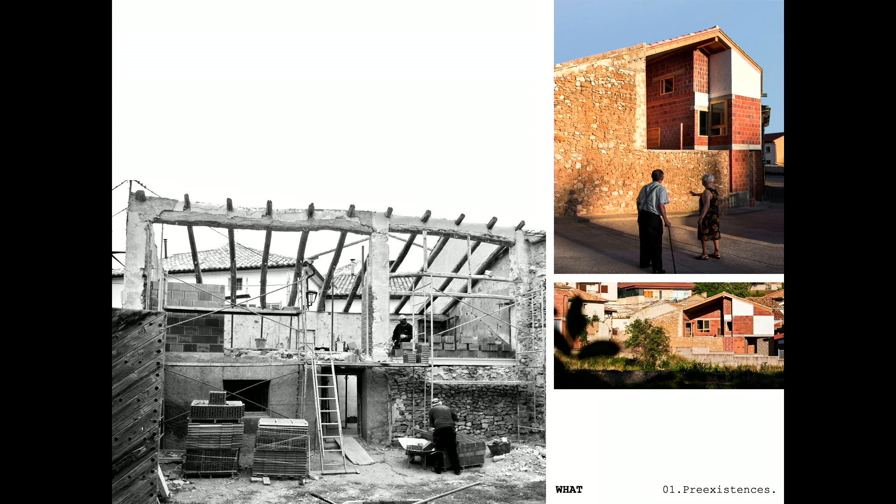The house is built occupying an old corral in which there was a barn, a small construction with 2 levels, one for the animals on the ground floor, another for the storage of grain on the first floor. The stone walls and the roof beams have been kept in their original position.

It is the geometry of these elements that shapes the overall volume of the project. It determines the inclination of the roof and the dimensions of the interior court.

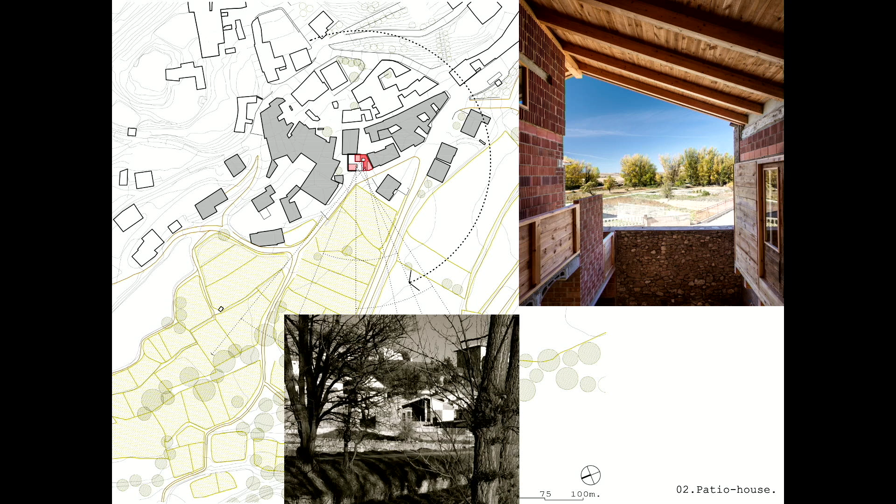The plot is located on the edge of the village, where the houses end and the orchards and fields begin. The house is protected in plan and adopts a U shape. In this way, it avoids visual contact with the neighboring houses and opens toward the landscape, and at the same time generates a patio, a courtyard in the center.

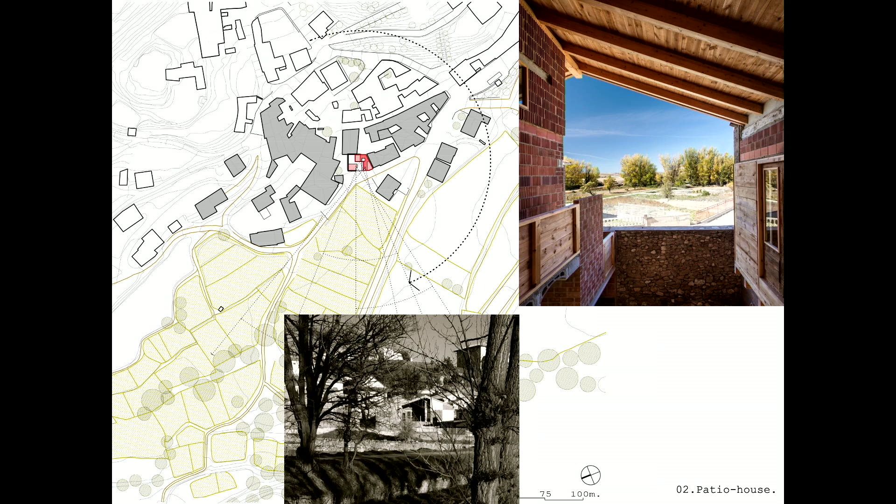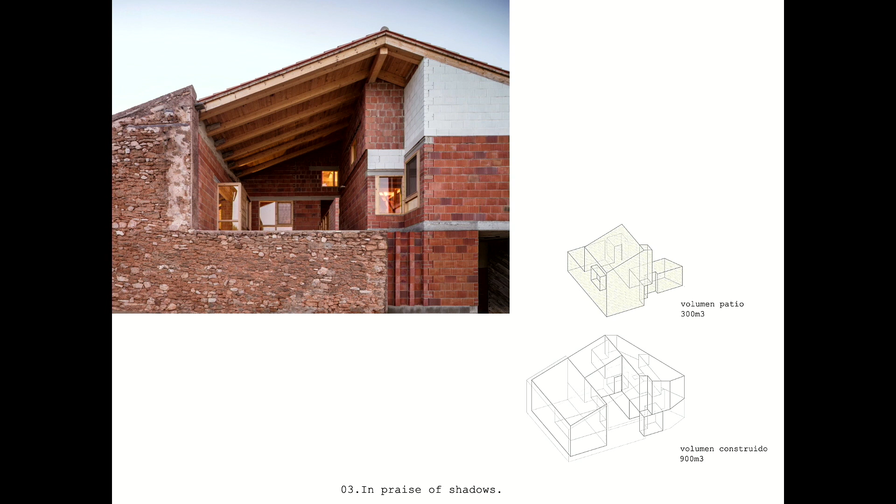The whole house is topped by a very simple sloping roof. The patio is also covered and becomes a kind of indoor volume, which remains always protected and shaded. The volume of the patio equals 1/3 of the total.

All the external woodwork faces the patio, and it's also protected from the water and sun. That's very practical because they can be very simple, and some of them even recycled. In fact, we could consider that all the woodwork is internal woodwork.

The access is through a large, recycled corral door. When it is open, it becomes an area to sit down or stop to talk with the neighbors at the entrance, which is a very common activity in the town.

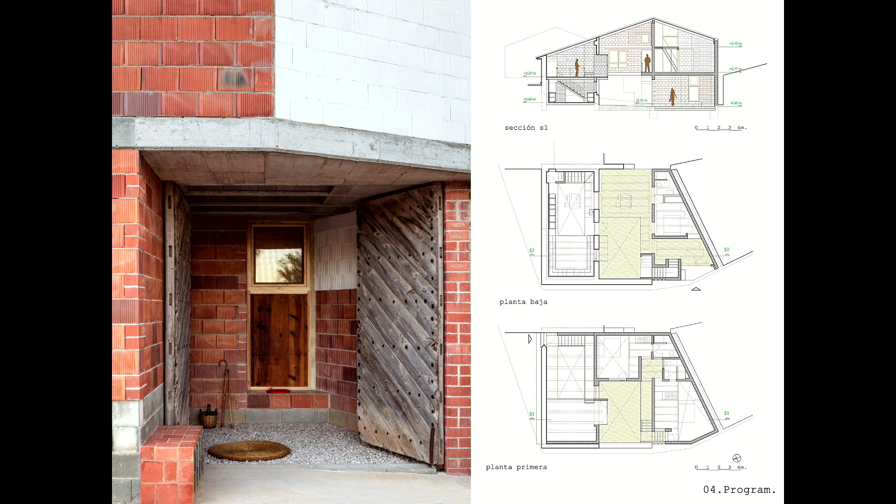This space communicates with the patio, passing under the house. The patio is the heart of the house, the most used and most polyvalent space. Most of the day it is shaded and well ventilated.

This is the access: on the right side to the common areas, on the other side to the 3 rooms separately. The common area is situated inside the thick stone walls of the old construction, which is also semi-buried.

These zones maintain a constant cool temperature, always around 25 degrees in summer. It contains the dining room area, also the patio, which is used most of the time.

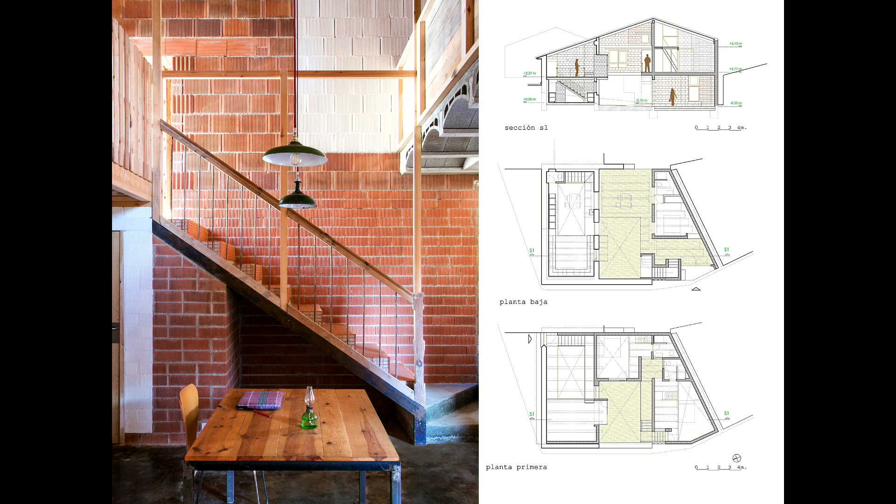The kitchen—well, in fact there are 2 kitchens in one, to allow the use of several people at the same time. And a wooden mezzanine with the living area that is also used as a study and play area for children.

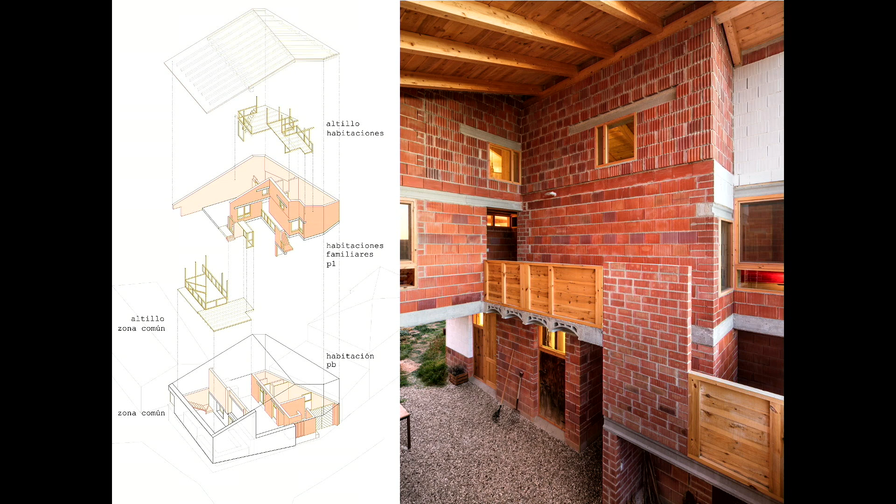The 3 bedrooms are situated on the opposite side of the patio: 1 single room on the ground floor and 2 family rooms on the first floor. They are built with brick, with a single layer of thermoarcilla, thermoclay.

These walls are, of course, less insulating than the stone walls, but enough to insulate from the sun during the day and accumulate some heat that is released at night. This works very well because at night the temperature drops a lot and it's usually quite cold. That's because we have to think that the town is at 1,300 meters altitude.

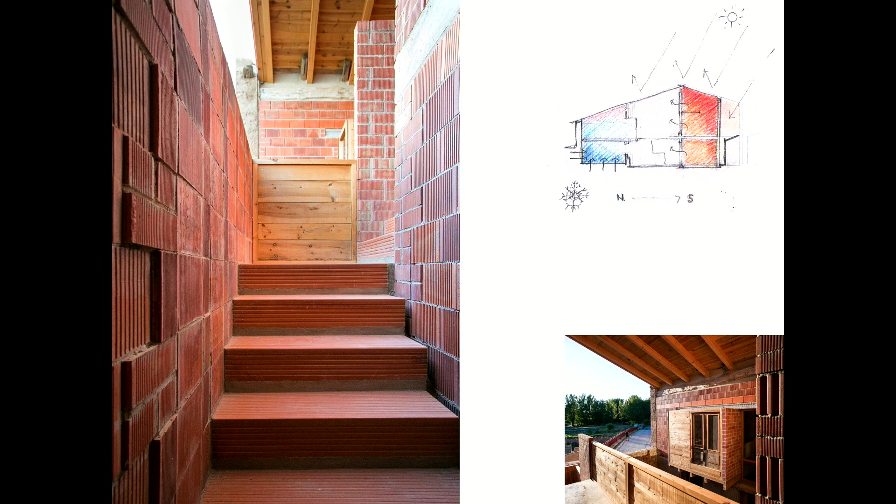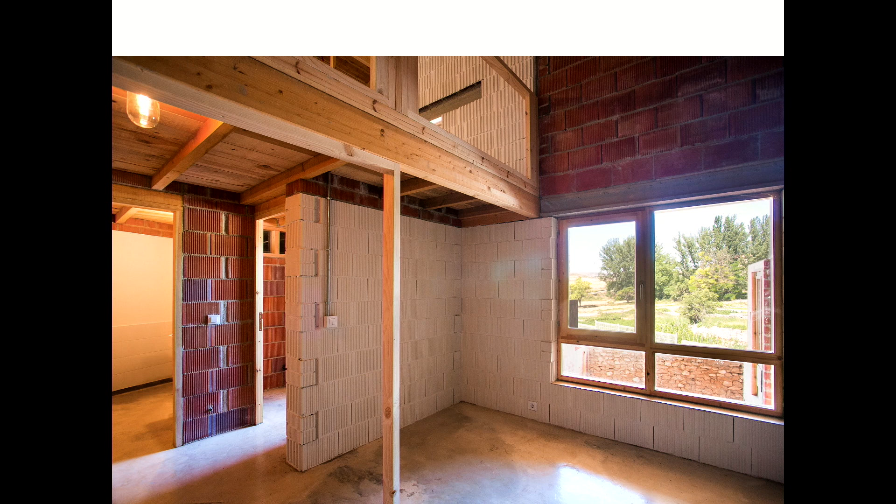The wooden superstructure occupies the highest part of the house, taking advantage of the space that remains under the sloping roof.

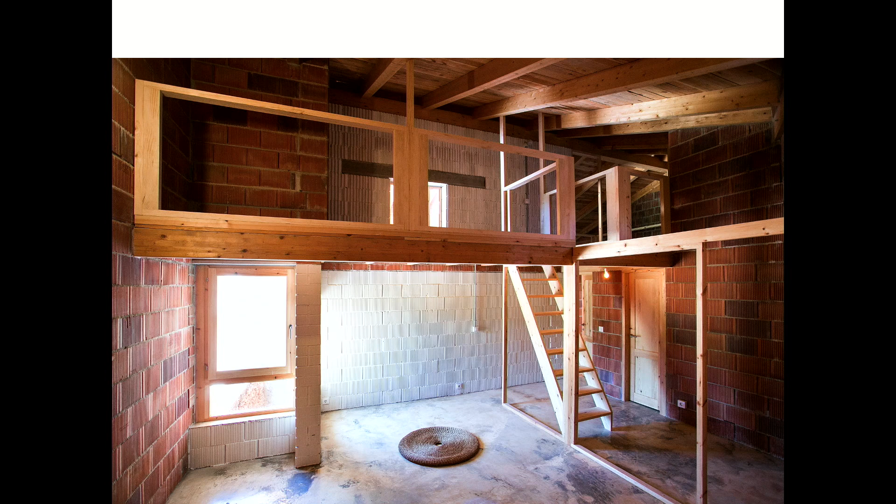The interior divisions were made with wooden frames that were later covered with recycled wood to make the railings. In the future, these divisions will allow us to split each room in 2 if we want.

I have to say that a few months before starting the construction, I didn't have a clear idea of what materials I would use to build the house, nor which would be the constructive system. The answer to these questions arrived in a very simple and natural way during the previous visits to the site.

While traveling through the surrounding villages and visiting the local warehouses and material stores, but especially looking for the builders who could work on the house.

I remember very well this day. I was talking with Puyo, a bricklayer who was doing small things in the area. He explained to me that thermoclay was used a lot, especially because it was a large piece and allowed them to work very fast.

And then, casually, he said: what I do is take the thermoclay 24 centimeters deep, because a brick is 24 centimeters long, so it allows me to combine 2 pieces without having to cut.

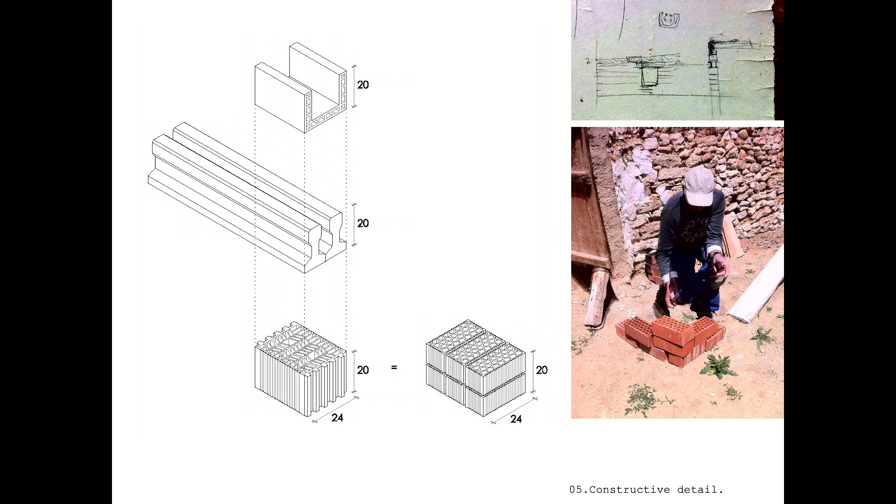The thermoclay piece of 24 centimeters combined long and height perfectly with gero, so one piece of thermoclay equals six pieces of gero. Thermoclay is the big piece, and the smaller brick we call gero. He also explained that the prestressed concrete beams with a height of 20 made 12 in the base, so two beams also made 24 centimeters, the same as the thermoclay and gero. Finally, the U piece also makes 24 bottom by 20 centimeters height.

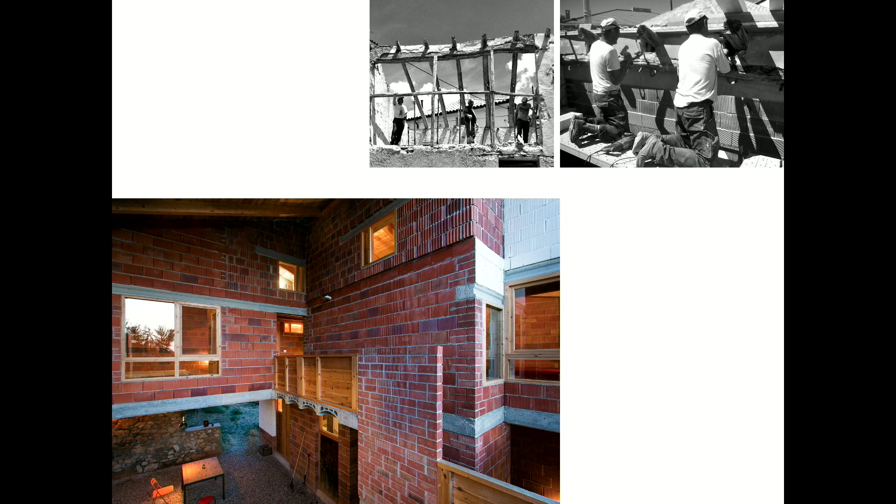It was a conversation of just 30 minutes in which we took bricks and put them on the ground, making one-to-one models of different situations. We also made some drawings on a wooden board that was at the site, and in these drawings, for me, everything was already there. In fact, I saw that with that unique constructive detail, the house could be built.

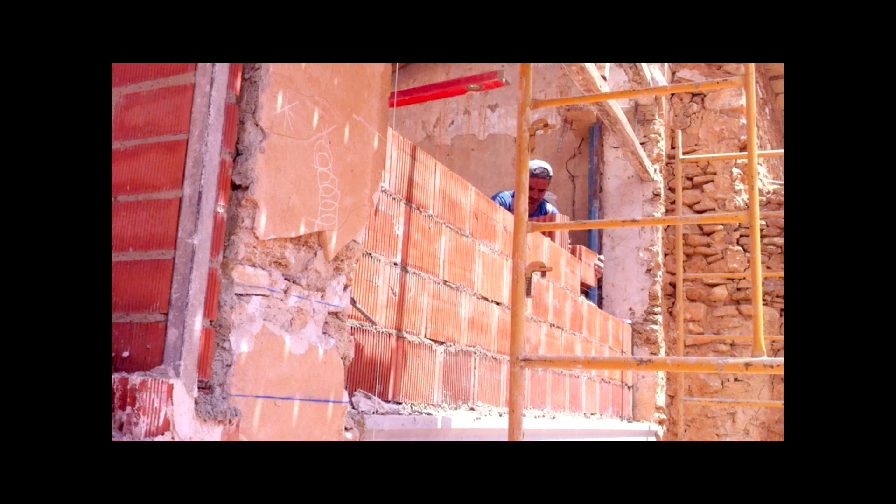Finally, we chose this brick layer and his assistants to do the work. They were a group of 3-4 people from Romania living in Teruel. They work a lot for the people of the area, doing basically reforms and partial repairs of houses. They charge by the hour, 16 euros per hour, 10 hours a day, almost non-stop. In this case, charging by the hour is decisive, because the simpler the construction, the faster they could work.

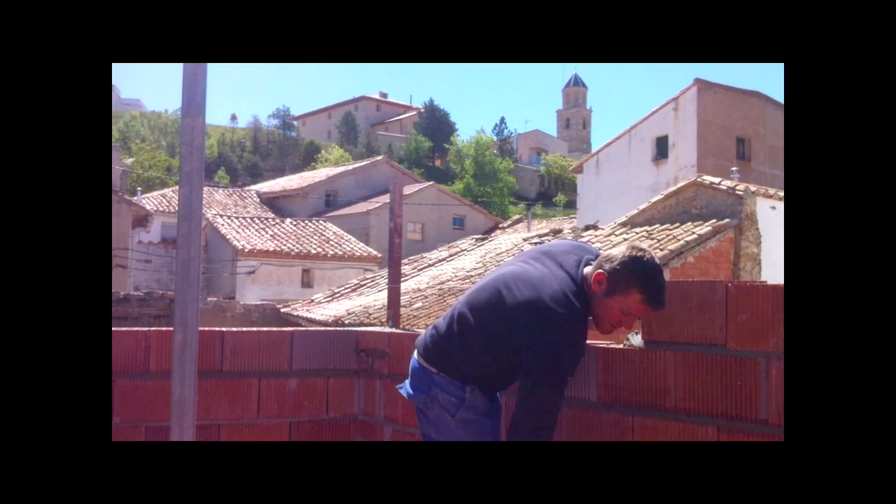And the faster they work, the cheaper the house could be. The fact that the constructive system we chose was very common for them allowed us to advance very fast and therefore economize the construction.

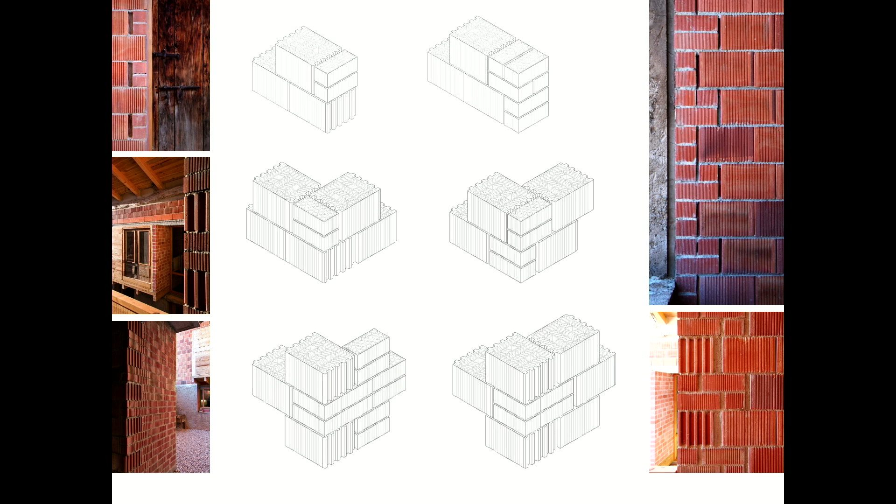The idea was to build like a Lego, fitting pieces without having to cut them, building a system of walls 24 centimeters deep with a horizontal joint rhythm every 20 centimeters. The combination of thermoclay with gero allows solving wall ends and corners in different ways, always without cutting pieces. It was about doing what they always did, but with the difference that it could be seen - the same system, but with good 'lyrics' (aesthetics).

Also, in the same way that happens with Lego, we were building the structure of the walls at the same time as the exterior and interior finish. That was also very good for the project, because it accentuated the confusion between inside and outside.

I have to say it wasn't the first time I used this kind of solution or materials - we had some previous experience. This is a project we did about 10 years ago, a kindergarten near Barcelona. It was the first time we experienced this with this kind of basic bricks, and it was something unexpected. It wasn't planned in the project, but it became a very important element in the final result because of the circumstances of the construction process.

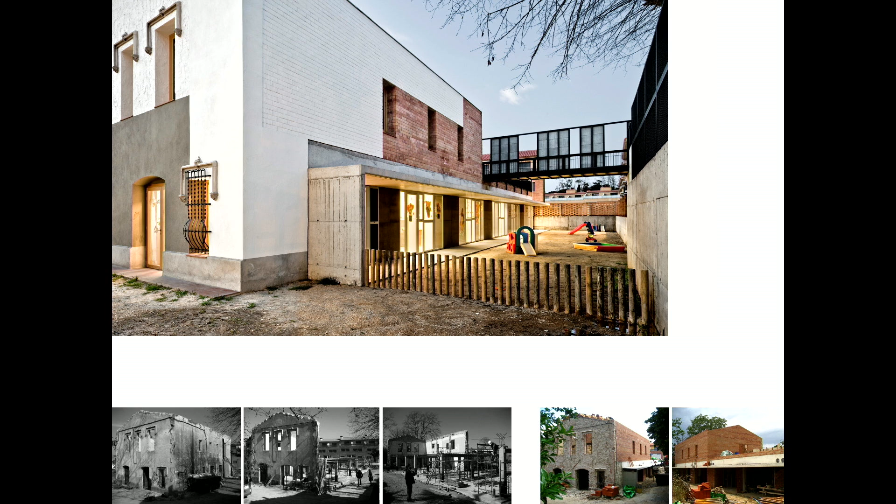We had to build a new school by expanding an existing building, but finally a large part of this building, an old house, could not be saved, and it was necessary to demolish and rebuild 50% of the volume. Since we had to remake the volume in its previous form, we wanted to differentiate the original parts from the reconstructed ones. So we convinced the builder and the town hall to make the walls with conventional brick, but without the final coating.

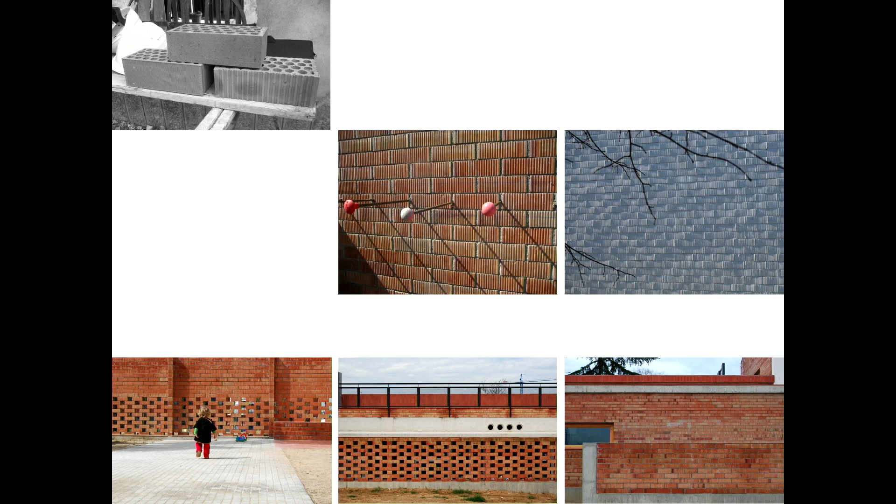We chose this brick with scratches that was already there. New textures appeared, and then also new combinations. We realized these were materials not very experienced in this final finish, but they could have great power of expression. It was a special result with a piece we had very close at hand - very easy, very cheap, and without having to design it.

We liked the result so much that we decided to use it on the rest of the walls of the new construction, and also in the perimeter of the site.

Now we return to the house in three springtimes and the towns around. Normally the towns around have two sides. One side is designed to show others, facing the street, with a finish that wants to be novel - generally smooth, rendered, painted, with conventional windows and doors, formally very similar to each other. But there is another side in these towns, the back side of the village, the one that generally faces patios and orchards - normally the part of the house where there is more life.

It's a facade that is not thought to be seen by others, but these are the places where more things happen, and from my point of view, where the most interesting things happen.

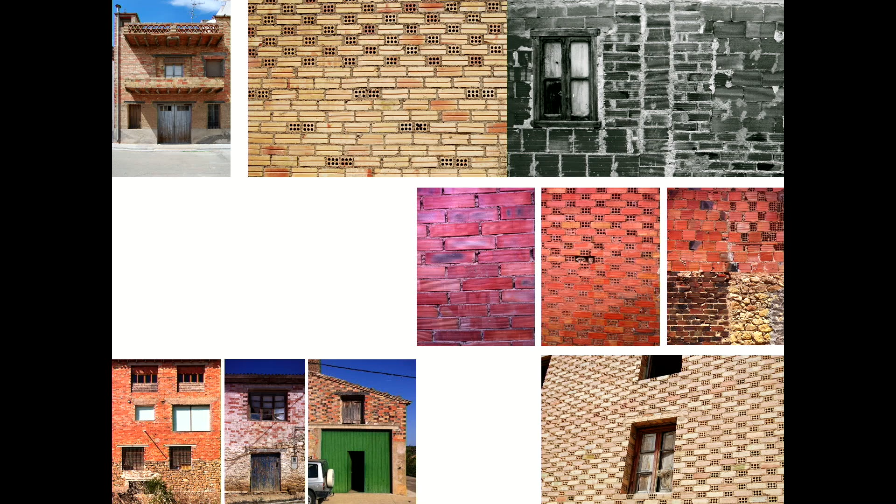We can find many original solutions, different textures and all kinds of experiments. Many types of ceramic pieces are used, especially in their most basic versions.

It is also the building way that is used in the repairs of old houses or buildings, for tools, vehicles, agricultural machinery, or animals. It is obvious.

People from the town think that it's an unfinished architecture, not meant to be seen, not to show. But it's also obvious that it's part of the landscape of the villages, knit and mixed with the old stone walls, and it's part of the rural landscape.

Bricks and pre-stressed beams have been natural substitutes for stone walls and wooden beams since the post-war period until today.

But is this vernacular architecture? Vernacular architecture means working with what we have closer, which is easier to build and cheaper. These were the criteria by which the town was built. During centuries, that meant building with stone, wood, and mud.

In fact, these were the only materials that they had, and were extracted directly from the environment. The result was an architecture integrated into the landscape and without architects.

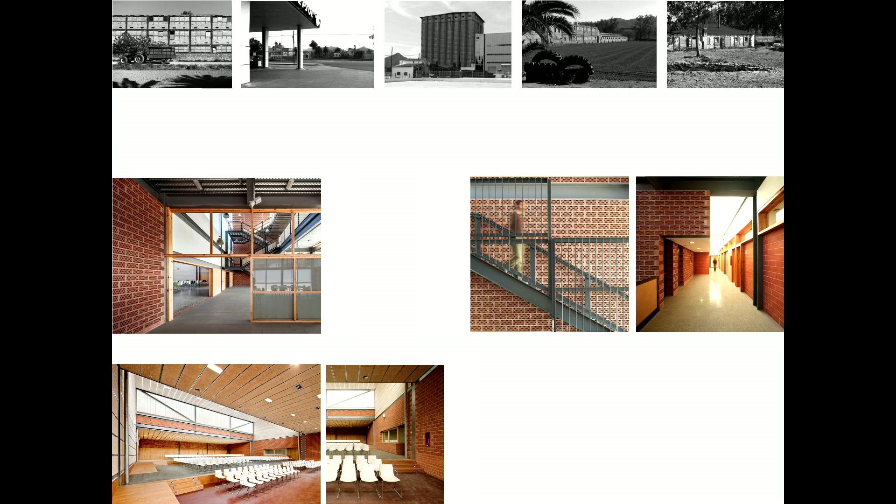That means two scales: an industrial environment typical of the periphery with light metal buildings, but directly in contact with small agricultural constructions, farms, and self-built architecture.

In this case, we use these basic bricks that we can see everywhere in the delta. We use them in part of the facades and in part of the interior walls, but also to improve the acoustics.

Or to solve the air conditioning return here, or to ventilate the room installations.

Some of these solutions were not in the initial project, but the continued contact with the construction materials and with the most immediate environment made the result look like this.

Continuing with the project of the house in three springtimes, the construction materials for working in these villages were basically obtained in local building yards. There were small stores in Utrillas, Montalban, Aliaga, little towns about 20 minutes away, and in Teruel, the capital, at 40 minutes.

Depending on the warehouse, you could find more or less variety of materials from different parts of Spain. But what was always in stock were the basics: ceramics, bricks like thermoclay and gero, prefabricated concrete products, and wood. If I used these materials, I could always have material available at any time, and for the construction dynamic I was going to have, that was a great advantage.

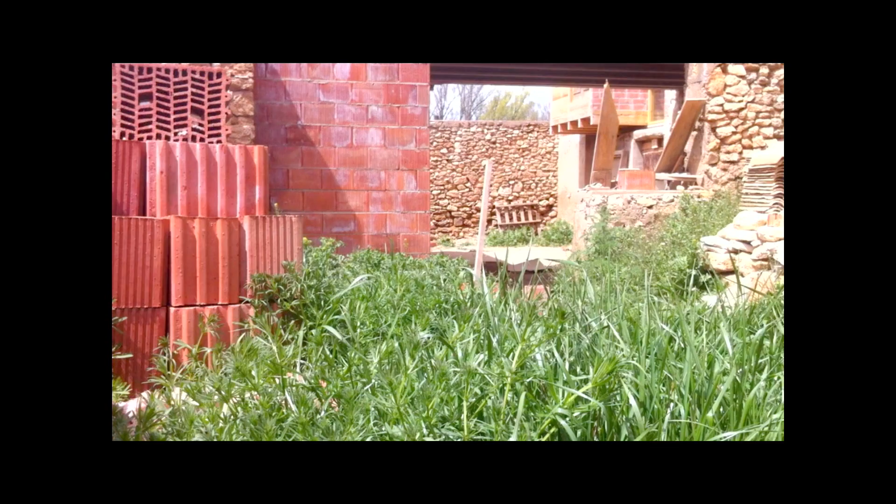The construction periods were usually one week, the maximum time I could afford to escape from Barcelona, and the frequency depended on the time they could dedicate, my personal circumstances, and the weather. Normally it was every 3 weeks. So the rhythm of the work was slow and intermittent, but very intense during the days we were working. They only worked when the architect—me in that case—was there, but when I was there, I was there all the time.

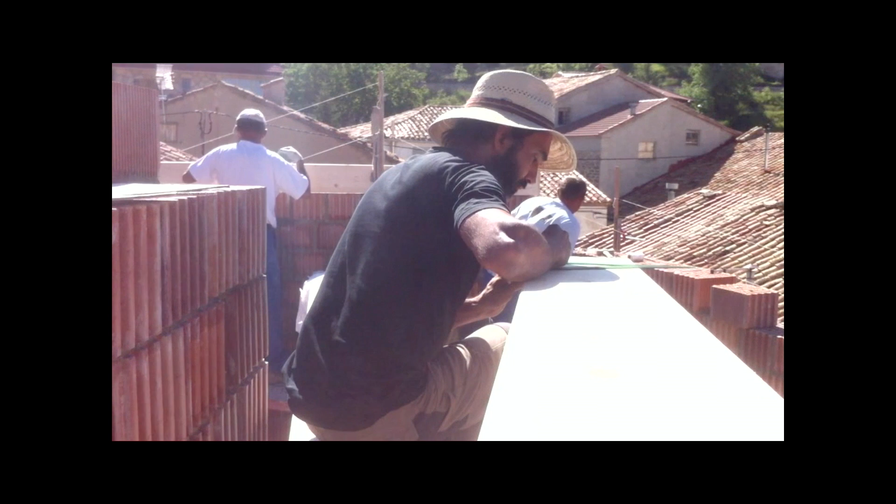This constant presence on site, combined with the intermittent and slow rhythm of the works, is very important to the final result of the project. It allowed us to change, improvise sometimes, and experiment during the process. If we think like a film director, the process was more like a documentary than a movie—with quite clear starting ideas and a start project, but with an open system in which reality and improvisation fit, and many times were the protagonist.

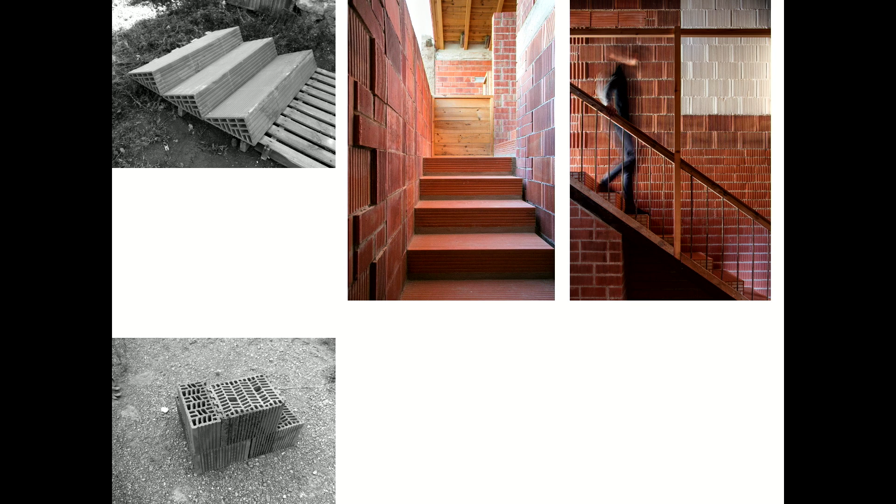During this process, we incorporated some pieces found in the construction warehouses, like ceramic steps and stock remains, things I didn't even know existed. We also found in the barn a large number of old woodwork pieces that had been saved from homes demolished around the area, and we decided to catalog and reuse them.

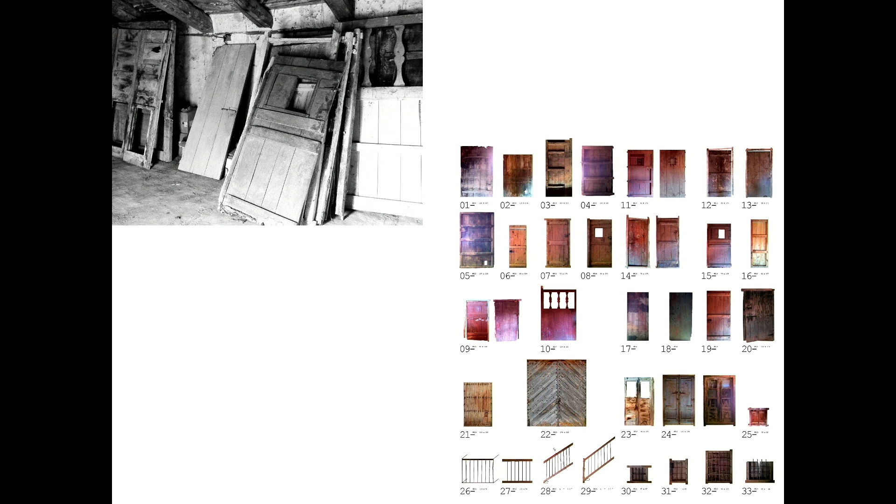They served as doors and windows, but were also recycled as interior divisions, balusters, shutters, etc. Of course, we also recycled stone, wood, and tiles from the demolished areas of the barn.

But we recycled in a calm way—I mean, we simply reused what we had close by and what could serve us, the way it has always been done in the villages. Things are repaired and reused again and again, just because it's the most logical thing to do.

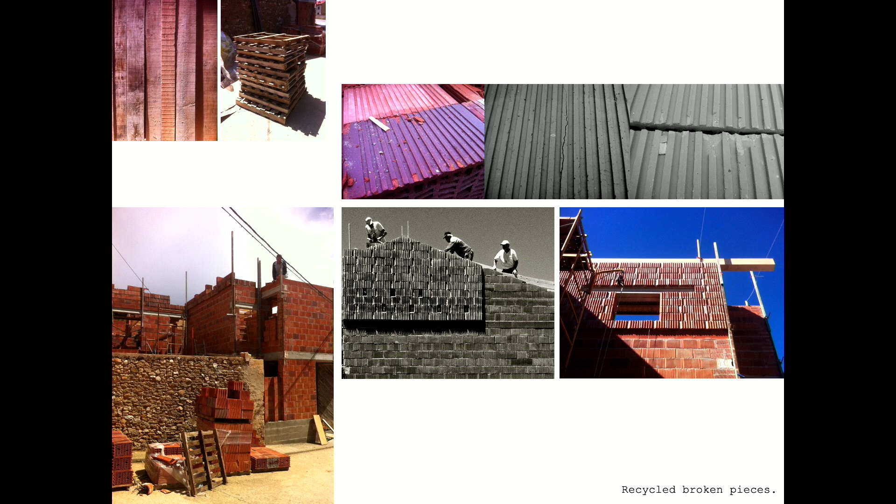We also recycled materials generated by the construction itself: pallets for handles and furniture, leftover Galician pine wood for tables, shelves, and handrails, or, for example, the broken pieces of thermoclay you can see here.

Some of these pieces were broken when they arrived on site, either during transport or due to defective manufacture. At first those pieces were returned, but later we decided to separate and save them for use in the final part of the house. We placed them turned 90 degrees so the broken parts weren't visible. The result was a different texture, which also helped us differentiate the final surface of the mezzanines from the rooms.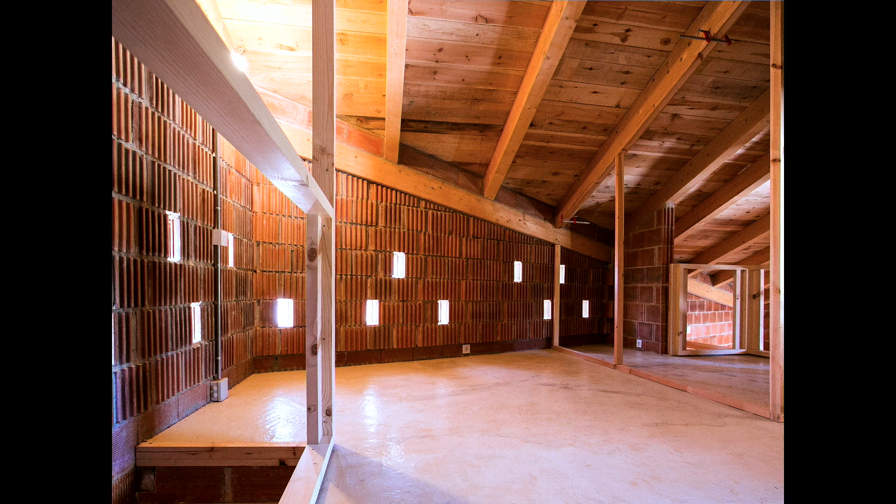The fact of having a lot of time to build the house could be an advantage, but the most important thing was the attitude I could have. When Frem asked me about references for this house, I could mention Lewerentz, Brodsky, or even Jujol with the Bofarull House, or self-references with Catalan architects with whom I've shared experiences and exhibitions like Sensitive Matter or Architectural Rovers. But if I have to talk about one reference, I should talk about this.

From Alvar Aalto's house in Muuratsalo, I like almost everything, but even more than the result, what really interests me about that work is the attitude. Alvar Aalto reportedly said about the experimental house, or summer house, that we must combine laboratory work with a play mentality, and vice versa. That attitude, maybe, was the clearest influence I had, and it's the one I tried to keep with me throughout the whole process.

That's all. Thank you.

Good evening. Thank you, David. That was an excellent and inspiring presentation. I would like to thank everybody here who made it possible in these post-COVID times that I'm here in person. And I'm so impressed to see so many real analog human beings, all architects, all close together. And I really look forward to the discussion later already.

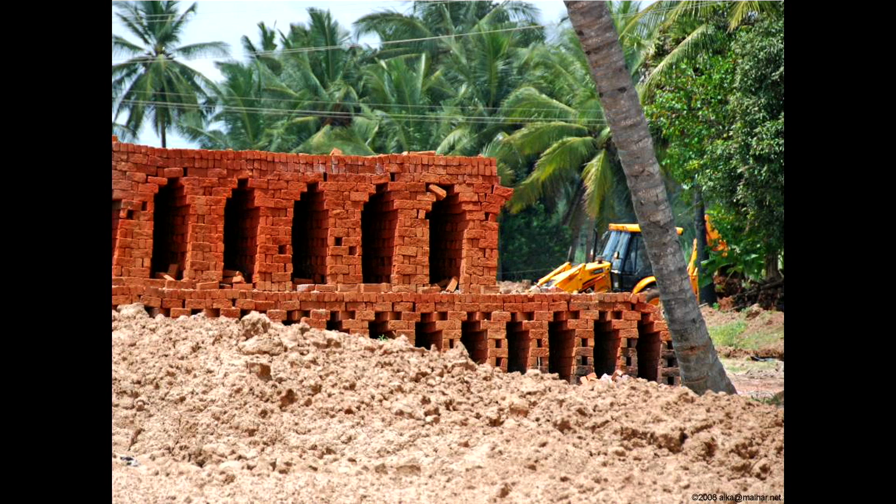So all over Africa, India, and elsewhere, you'll find small producers of bricks. What's interesting is that as a child, when you travel through the landscape, you see brick making as a normal thing happening in the background. And the bricks that get made are actually not like factory bricks, where you have to build huge ovens and Hoffmann kilns with coal going into it.

The ancient way of making bricks, which is still practiced in most of the world - still pre-industrialized in our time - is that the bricks are stacked as a pile, and the stack itself is the oven. When they finish cooking, the bricks are sold, and the whole oven is gone. This is how humans made bricks.

The genius part of brick, why it was a manufactured material, was because it was modularized. And even though the brick is rectangular, you could make curved things with it - unlike Lego, by the way - because the mortar allows you to do arches and all kinds of things.

What was interesting for me was to see how bricks affect the socio-economic and environmental impact in today's time, because most people dismiss bricks as a high energy material requiring so much coal. In my journey - three decades as an architect, coming from Bombay, from conventional schooling, and discovering things by thinking more deeply about them - I realized you cannot just say that brick, in all our green rating systems, is measured only by how many kilojoules it takes.

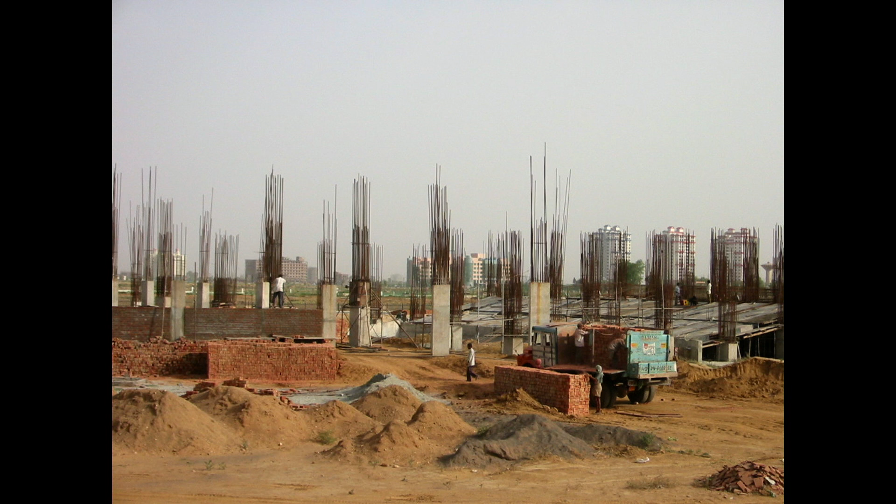So I went into deeper questions in this journey, but I want to explain where I came from: that brick, even though we have built the biggest complex cathedrals and large spans and very tall buildings with brick all over the world, by and large it's not natural laws but human laws that have prevented us from doing more genius buildings with brick, because we have made bylaws such that we can only use bricks as infilling material inside concrete.

We've made this true in every country. I don't want to deviate, but I was quite intrigued that a brick is not even allowed to take weight in many places. Even in Australia, they call it veneer, brick veneer, as if it's just for show.

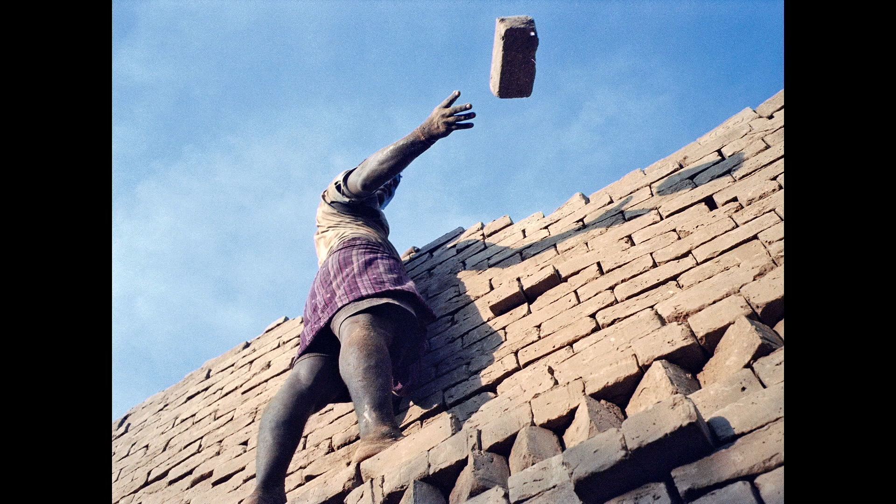So having looked at this area, I realized that to understand the complexity of materiality in the age of climate change, we have to look at the material not from the time we get it from a manufacturer's catalog, but from the way the material is already manufactured. Already there are questions embedded.

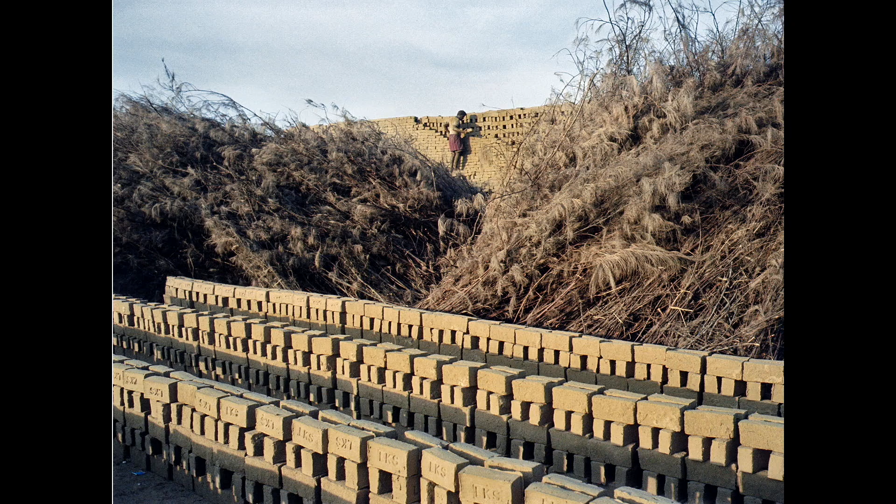Here I noticed in our context, these are regular industrial brick sizes, but they're not industrially made—these are handmade bricks. And I started realizing the way the making of a material like brick is embedded in the territorial questions of the place.

For example, these thinnings that come out of reforested trees grown for the purpose—these trees are grown for scaffolding, because this wood is mostly casuarina. It's a very straight tree, very useful for scaffolding. And the thinnings of those that people planted are used for firing the ovens.

And these are the typical brick stacks, which are then plastered and closed, and then these go into firing. After they are fired, the bricks on the outside are a bit cooler, so they are less baked, so they are either rebaked in the next round of firing. So there is no oven—this is the oven. Whatever is external, you might use in interior areas where you don't need such total brick strength, or it doesn't have to be that waterproof, and so on.

So the fact that the material is not standard, and the humans who were also doing custom-made solutions to housing allowed those types of imperfections which we appreciate now—that David also showed in his work—that human discretion, if it is not left out of the equation just because of over-standardization, then we have so much to gain.

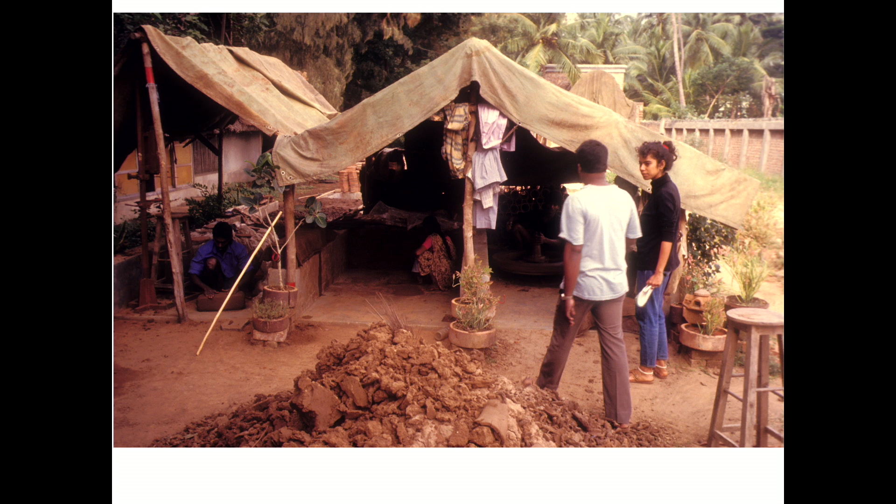I'm just showing you an image of myself from 30 years ago when I was doing this. It was just straight out of school—I started my practice at 23, actually. I think a lot of things, you are very naive, and it's good. You don't fear so much. Later, as you grow up, you put too many questions and don't want to take risks, I suppose.

But what was interesting for me is to realize that there is no boundary needed between brick and the use of terracotta, either in floor finishes or in the construction of roofing tiles and so on. I started discovering that whenever a material exists, like clay, there is the skill. It looked to us like there's no labor—unskilled labor, we were calling it—because you thought, oh, there's nothing in this place. I came from Bombay where there was nothing. And then I now know that there's always something: in the foreground there is clay, in the background is the skill of some people making pots out of it.

So I started working with that material in a holistic way, not separating the brick from the masonry of the wall, from the ceiling, and so on. And eventually I landed up using cones that we made with coconut shell, fired in the open, just the way they do it, making stacks next to the rice fields. The people are not necessarily working in factories, but just producing the material. It's all temporary, but the house is permanent—the processes don't leave their imprint.

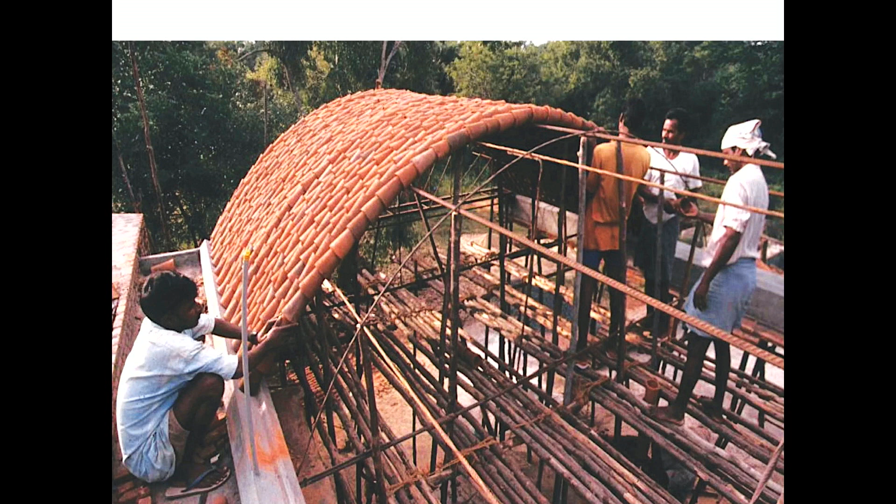I started using this kind of highly insulating materials for the ceiling through catenary curves. That's why I don't know anymore what is vernacular and what is high tech. People would call it low tech, but you need to know lots more calculations somehow to do these types of things, which we usually do empirically.

So the advantage of this kind of system is that you don't even need—the traditional roofing tiles need a lot of wood substructure, and we don't have wood anymore. So this was a way forward to intelligently use these materials, and I needed a lot of support from the craftsmen. I was supported much more by them than by the engineers, because the engineers were telling me all the things we shouldn't be doing, and the craftsmen were just eager to try out. I had a sense of confidence because they are used to handling material.

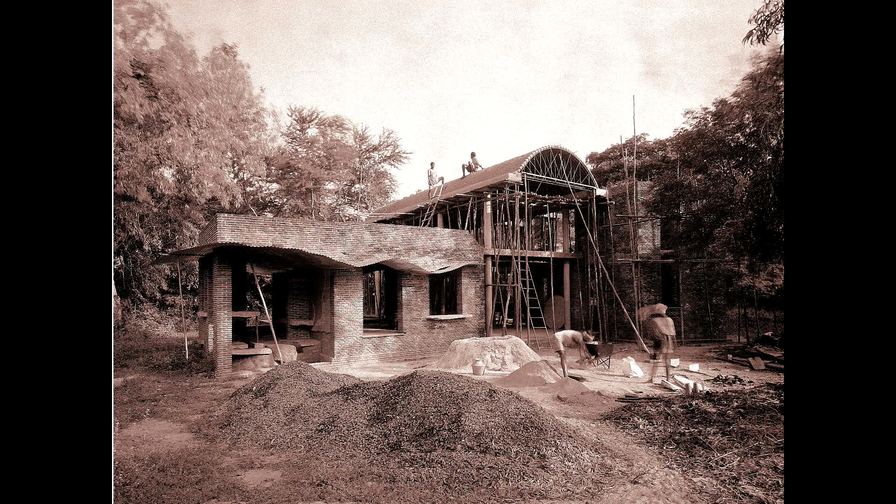So with their help, I was able to produce this same wall house. But I started thinking, and I did so many more experiments on the side that I won't have time to tell you about. I made all kinds of things with the terracotta once I started, and I had a sense of community with the craftsmen, and we got ideas—these are for making this kind of jack arch kind of system, also in masonry for flatter roofs, because those roof vaults will not allow me to use the ceiling, even though it's efficient.

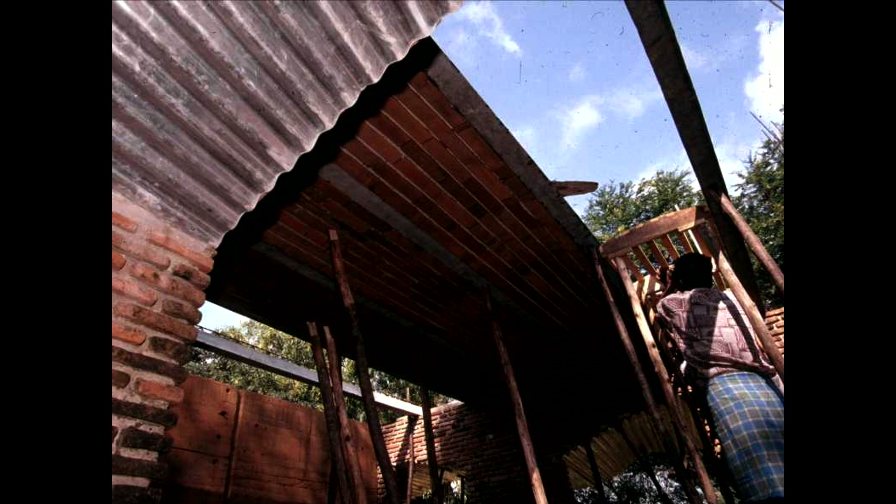So I need a way to make flat roofs, and at the same time, to not always need potters, so that any person looking for work can do this, we had to design extruders where the clay would just come out of a slightly trapezoidal form, and then you would just cut it.

Anyone could produce it. The idea was to build so anyone can build almost. Because instead of looking at the poverty in the place, I was trying to look at the abundance. What do we have a lot of, and how can I use that? Then suddenly, instead of feeling poor, you feel rich. So it was very simple.

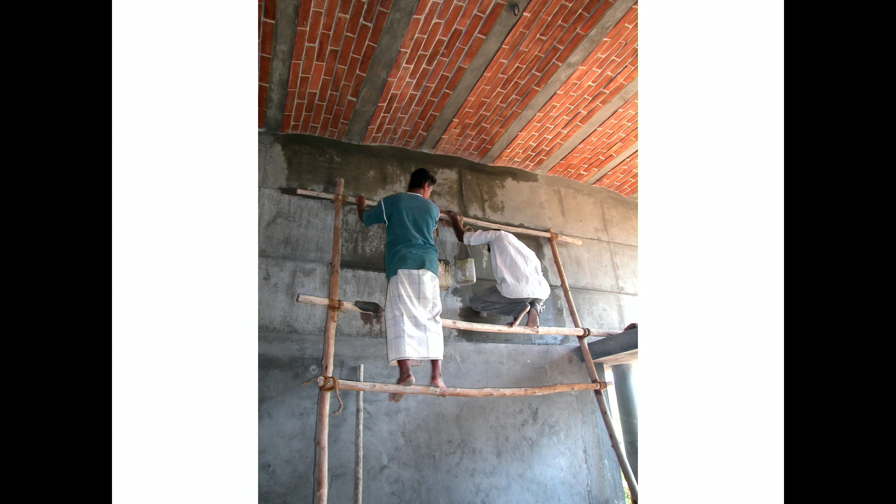So what do you have a lot of? There's clay. What do you have a lot of? A lot of potters. You have these people, sometimes you together upgrade knowledges, and you figure out how to go forward. And as I went along, I actually found a way to use the original pot that got me thinking.

This is the rice cooking pot, our version of paella. It's called pongal, that they make in this kind of clay pots. Nowadays, there are entire communities who know how to make that, but nobody buys them, and they keep trying to sell them. So urbanization is threatening the livelihood of craftsmen, and I was thinking how to give them a permanent assurance to their livelihood if we make products that we can absorb in construction.

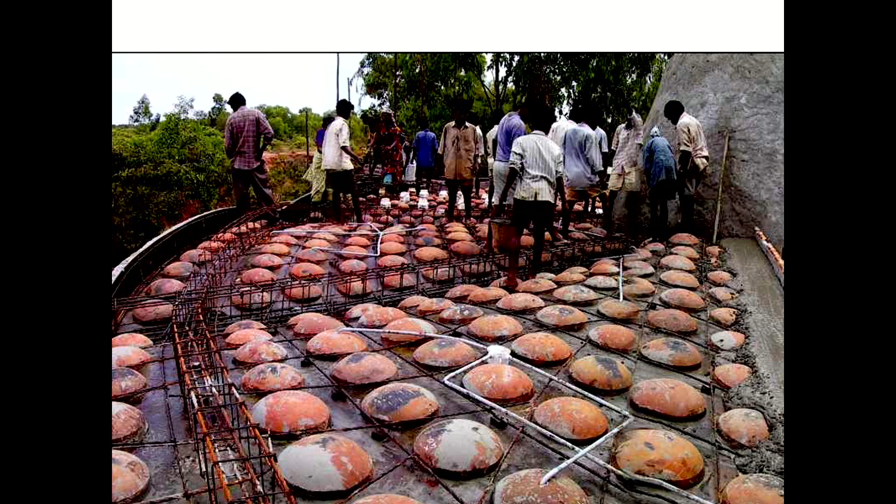So then I started developing other ceilings. For example, I used these kind of pots to create lost formwork, to be able to reduce the steel, like 2 steel bars could be removed out of 3, because it is used as an efficient waffle slab principle. So I started using terracotta for all kinds of things, including formwork.

And this is, of course, in this wall house again. The wall house became my laboratory, and I tested here all the things for larger projects where I had bigger spans to solve, like a 14-meter span multi-purpose hall had to be made, and I didn't want to have those beams. So I tested this in the wall house, and me and the craftsmen could test.

But then I also did about 6 types of roofing systems in that house. I had to really watch out that it doesn't become like a cacophony, because it was my laboratory, and then it should also look like a house. But I wanted to test things without the pressure to have to prove to others. So here, for example, these are for intermediate floors, flat vaults made out of the same brick, because here I don't need insulation. So the same material of the wall is the material of the floor.

So in a way, this house is still, for me, a very contemporary space. I'm not a very nostalgic person. My sense of space is very contemporary. But I don't feel that contemporariness has to be delinked from the material and the making of the spot where we are, because I do think architecture has to be grounded in place, or we don't feel very well.

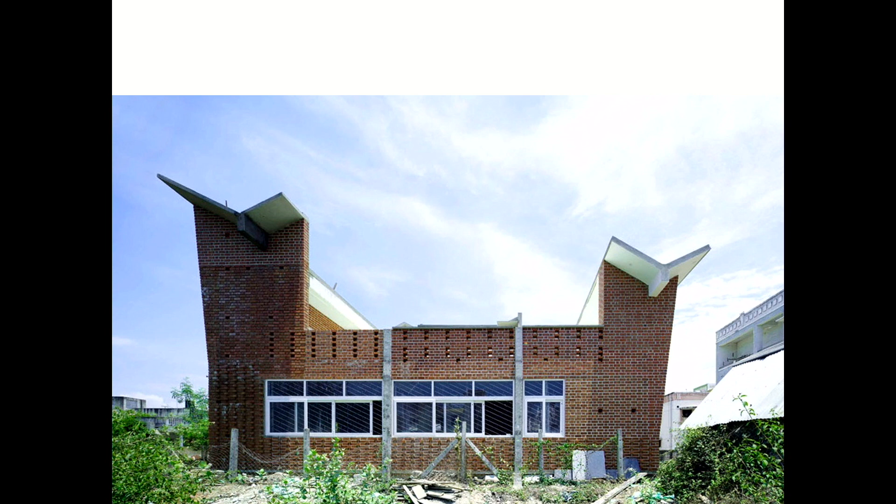So you can see this is Pondicherry, and this is a library which has braille books, a very modest building. In fact, we have not completed this facade because the owner passed away, and now this is not finished. There are some kind of screens that were placed here. But yeah, so to make that building stand out as an institutional building, but very simple budget building, where it's just very simple and basic.

And other people's buildings are also made in brick, but they are more untidily made. And now the culture to plaster in India has led to the fact that you can work anyhow because it won't be seen. Because it's a makeup culture now, everything is hidden. The pipes are hidden, the conduits are hidden, everything is hidden, everything is complicated to repair, and it allows us to be untidy, which I think is a very big loss, because we actually knew how to be neat.

Now, so there is a lot of unlearning, even to get this simplicity out. There's a lot of rethinking involved for all the craftsmen as well.

And then there is one project, a daycare center, in which I've used terracotta screens, because we didn't have the budget to really do more, it's a very low budget daycare for homes for the homeless. It's associated with children who come from very difficult homes with very socially challenged stories. And then I wanted this place to be very solid for them, so that they feel like it's safe and all that. But the budget was quite small.

So I made all the walls porous, so that there are just large overhangs and a breathable kind of facade, so that we don't have to have too many doors and windows, which are always expensive. And yet children have a sense of, with these little angles that, instead of parallel walls, there is a sense of enclosure for them, and it gives a sense of territorial identity. So there are some small details like that.

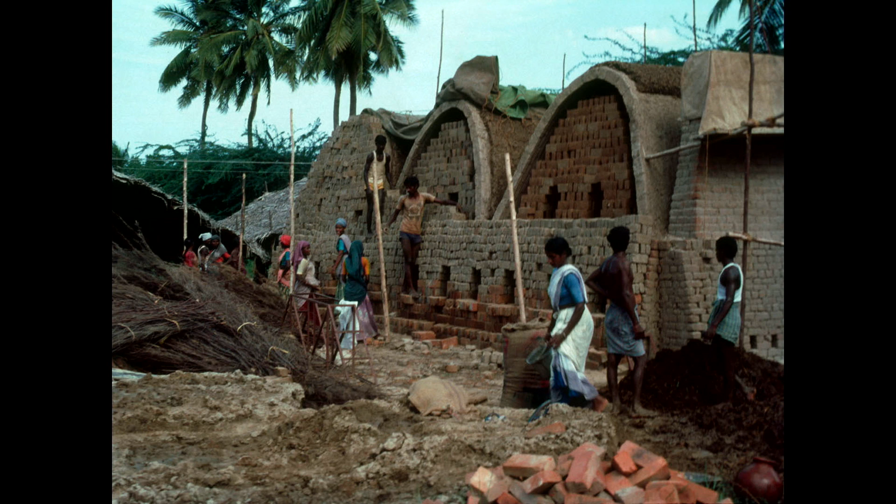I'm going to show you a few images so you understand what this means. Ray Meeker had been concerned that in typical brick making, about 40% of the heat you generate—you need about 980 degrees Celsius to make a brick—is lost in the oven wall. Each time you fire, the cold wall takes all that heat, so you have to put in much more heat. That's a kind of wastage he wanted to tap.

So what he thought was, if you could build a brick house and fill it with brick or other ceramic products that you have to cook, you use the house as a temporary oven to cook your real bricks. Then, with some genius insulation, you get the heat you would have lost into a kiln wall for free, to cook your house instead. And you end up with a ceramic house for the price of a mud house.

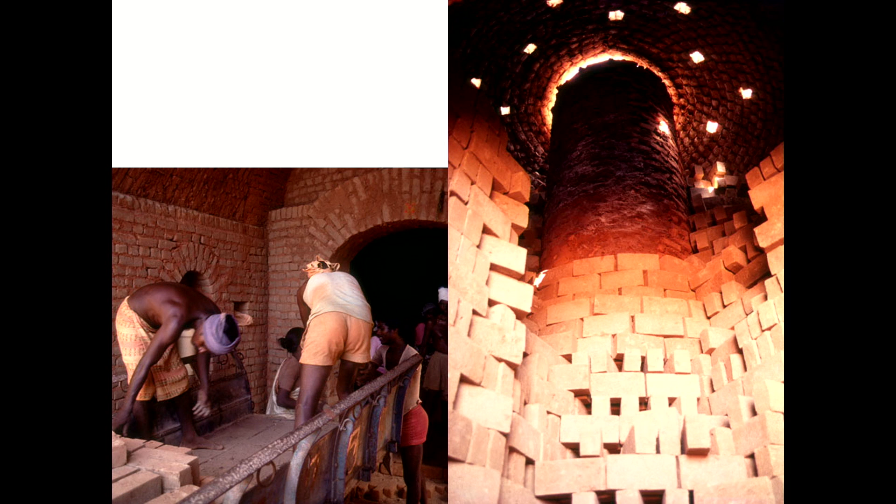We have monsoon in India, it's very heavy. This was inspired by the ancient way bricks were stacked in Mohenjo-daro and Harappa civilizations—it's the same way. He kind of combined that into a user-friendly technique, and I had been following his work beside my own profession. I was fascinated that the house would then not be a consumer of building materials, but a producer of even more local building materials, creating local economy. I was very impressed with that prospect.

I was also interested in what the brickwork would look like. It would not look like the pixelated, uniform light and dark pattern—no brick can be equal, because each lies in a different spot in the oven. In Petersen in Denmark, I went to their factory; they have to artificially sort the bricks so it doesn't come out random, using another mixer to standardize the look. But in this technique, what happens is like brush strokes where the heat travels—somewhere it's light, somewhere it's dark, the fire has its own path.

Long story short, I did all this analysis. I just want to tell you it exists online in my PhD.

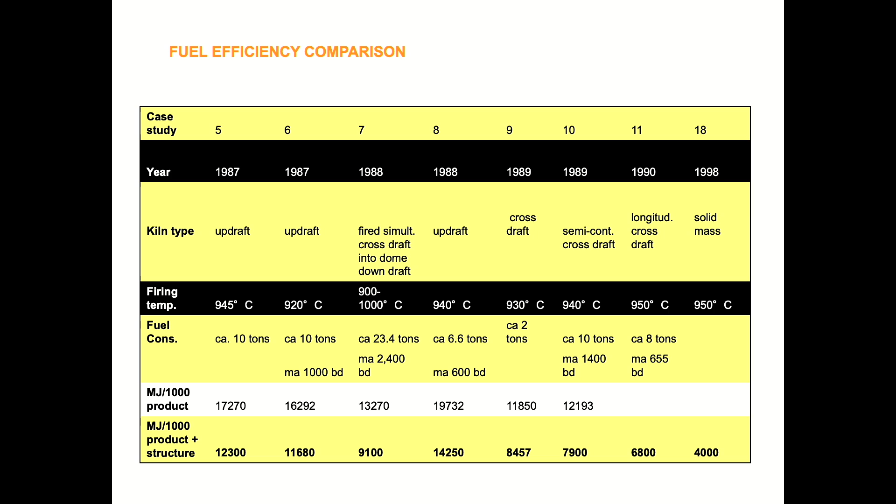We compared all kinds of kiln systems. Ray Meeker did different kinds of architecture based on different types of kilns to see which type would lead to the most efficient house, where the brick could take half the energy to produce.

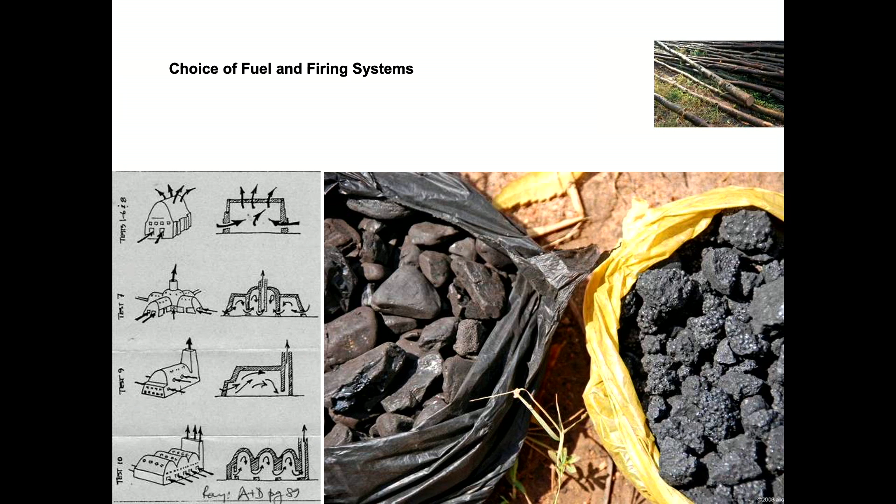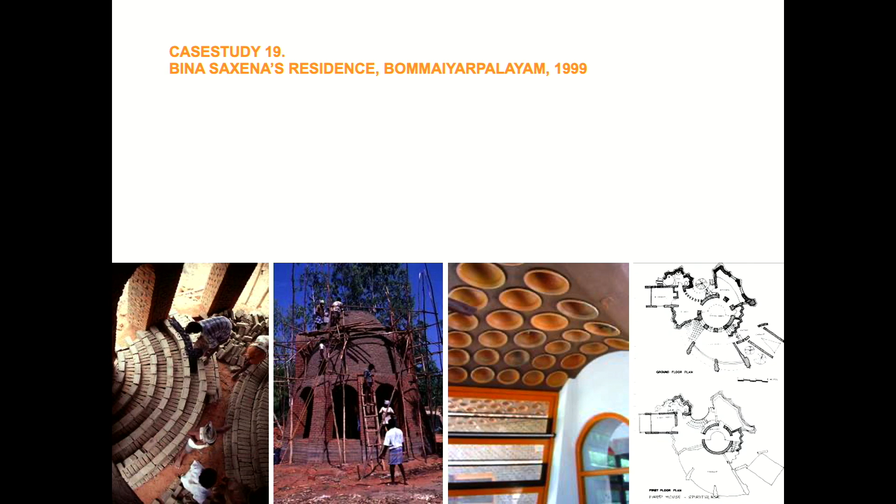It was in 1999, long ago. Eventually—sorry, I'm going to skip this, I forgot to remove these slides.

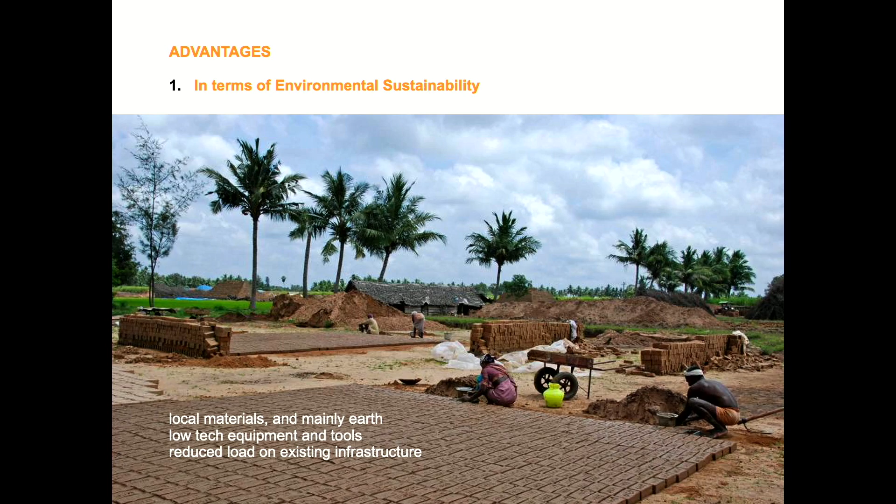But basically, in terms of a holistic, sustainable solution, in the context where brick making looks like this—if it's allowed to not be in a factory, it's just on the field. When they make bricks, it looks like an activity, and when it's done, it's just a field. That's how it is. Anyway, I forgot to take out this animation.

So basically, I'm going to show you that last project: the homes for homeless children I did in 2008, which was about having small clusters with foster parents looking after one parent per four children.

I realized after all my PhD research, looking at all the ways bricks are made in the high-tech and low-tech parts of the world, that if I want to make this a real viable option in terms of competing from the energy side, I should make the brick very thin.

The reason we managed to cook it through easily was because Ray Meeker invented a combustible insulation. He was only getting up to 650 or so into the wall, but he needs 900. So he put up a mix with a little bit of straw and things which burn.

So in the last part, when it's at 650, that outer insulation just catches fire, and in the last minute you get another burst of fire. It's a lot of years of experimentation, what I'm telling you—very exhausting work.

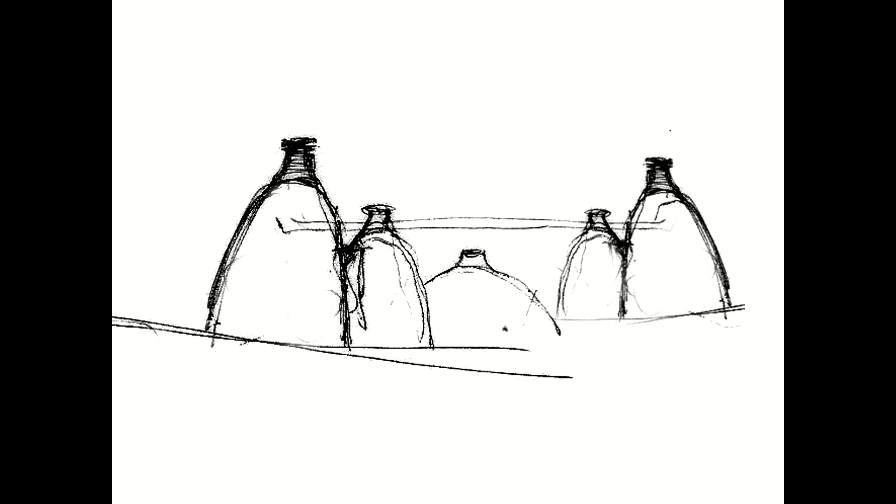Then I designed the whole housing to not have a division between a vault and a wall. In the beginning I started with that, and in the end I realized that space, like the womb, like the egg, is also a home for someone. There was a very deep discovery in that, and I realized that is the cheapest thing to fire.

So I'm just going to quickly show you. We built with mud—you build mud bricks, make your bricks, then make your mud mortar. In my case, I used whatever I could.

There was no money for this project, so I used any kind of junk things to make formwork, and adjusted the holes around that. I used fired brick only in places where I needed a little bit of stability.

When the fire comes, like when you put bread in an oven, you see it becomes wobbly for some minutes before it becomes hard. The same thing happens to the entire house.

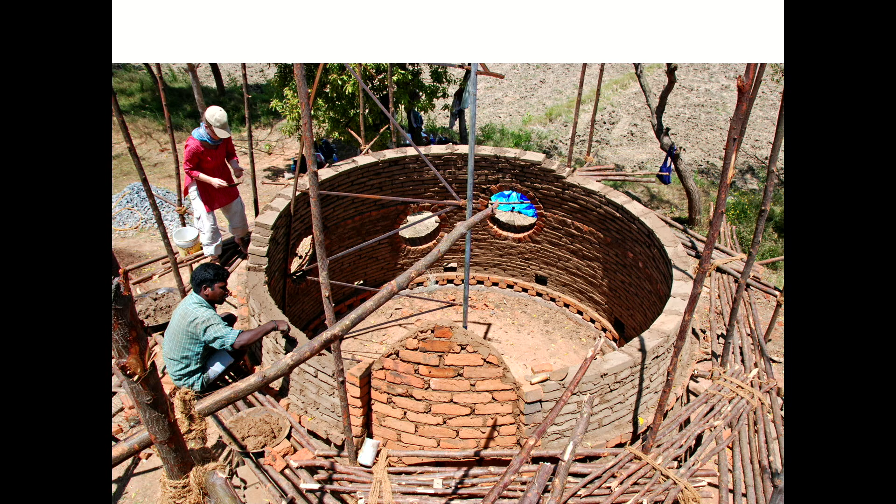So you don't want the stack inside to collapse, so on the edges we used these kind of bricks. So you have your dome.

Then I made some kind of formwork, like a rotating pivot—everything has to be designed in our place. It's like you want a dress, you have to go to a shop, choose the cloth, you have to do everything. So these are all the results of that kind of life.

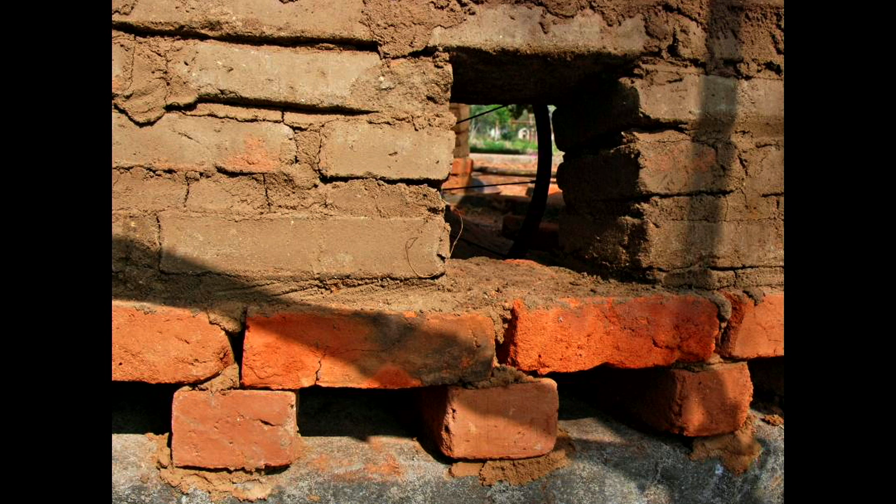So then you have to make little fire boxes to start the fire. The difference between this project and the others is that we found a way not to burn with wood, but we took the coal dust from the factories.

It's a waste product—the dust from factories where coal still has some value, a powder left on the ground. You sweep it, it still has calorific value.

We mixed 5% of that into the brick, and tested that if you put all your bricks tightly, that coal will burn and stop exactly when the brick is cooked, and it will go to the next layer, the heat.

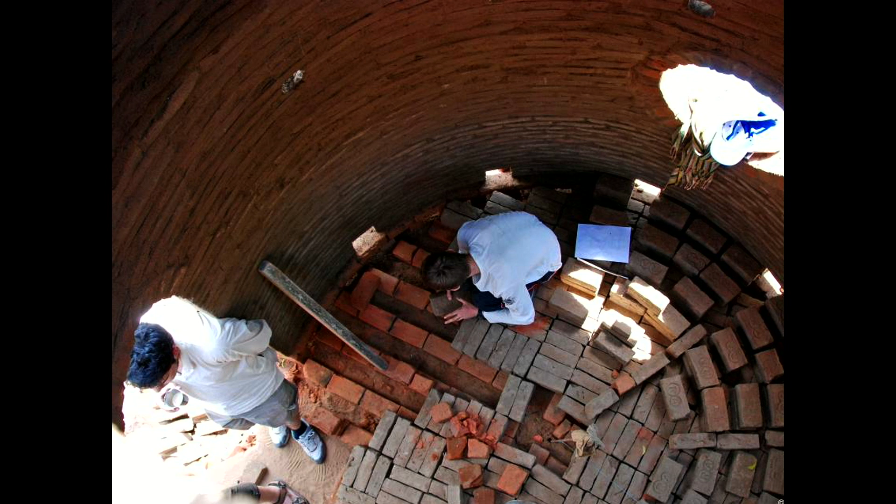This is a different type of firing we did here. We needed boxes like this only to start the fire, just to give it a start. And in the bottom, it's like a grill. We had to design it so air can come from below. So you see all these complicated shapes.

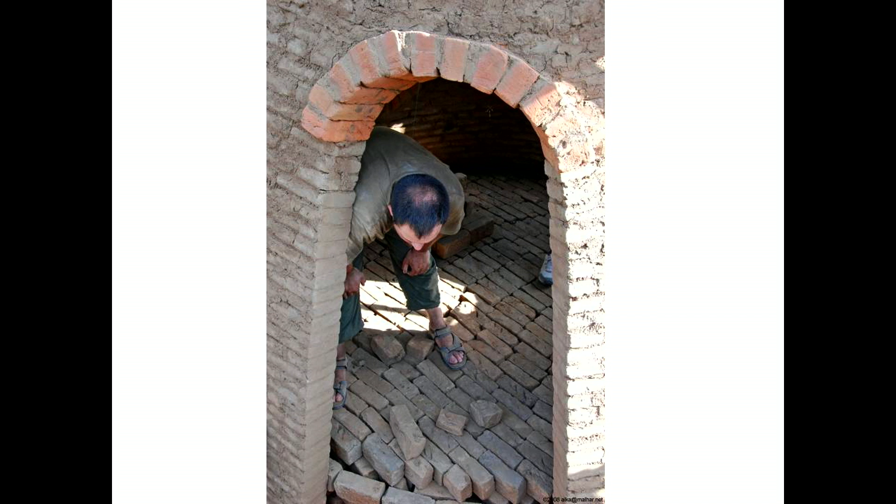In one layer, we had coal put to start it, but all the rest are just normal, spreading the heat. Then the insulation I talked about, which will be taken down later. Then the house cooks for 3 or 4 days. And it looks very amazing.

It's like waiting outside your oven to check how it is, like that. And you can't do anything. If you made a mistake, you have to do it in the next house. You have to just wait. You can't do anything, it's already out of your hands.

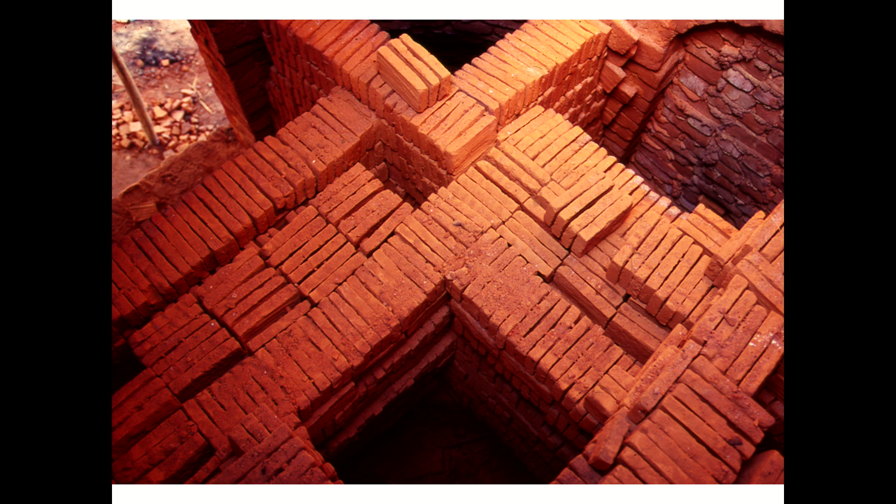Then the house is cooked, and we'll have to waterproof it. But then all the bricks inside can be harvested, and you can make all your own sizes. You can do whatever you want. You can also make wash basins, tiles, pipes — all the ceramic things we use can all be made here. You can make bricks of any shape you want.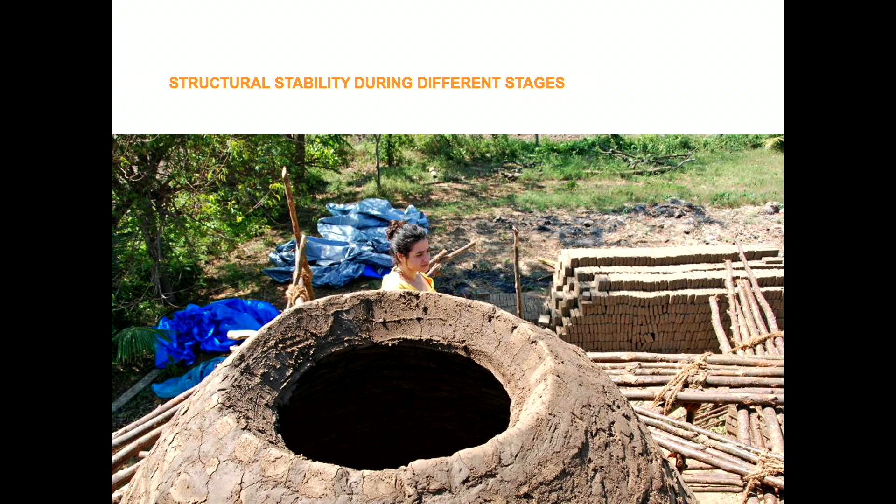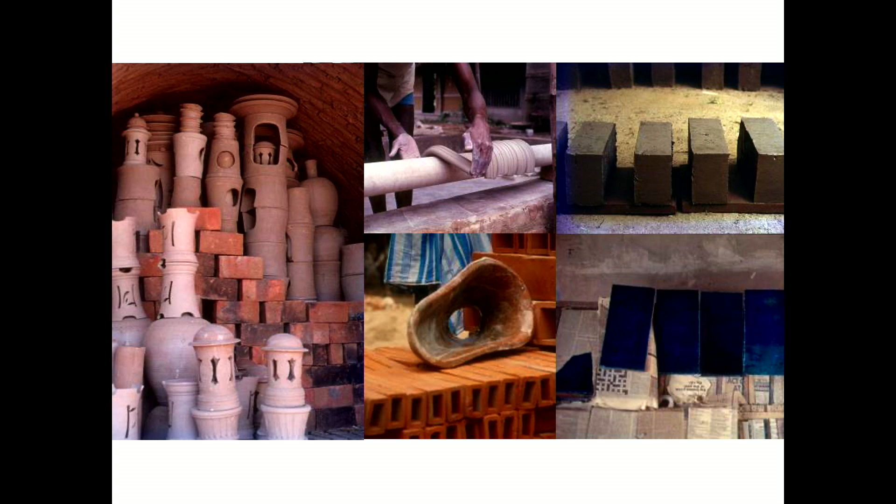The brick has to withstand being a mud structure, then it has to withstand the baking moment where things crack, like in bread. Cracks are going to come, and when it cools, they will all fill in. All those things will happen, and then you will finally get a baked house. So there's a whole industry you can do out of it, like I said.

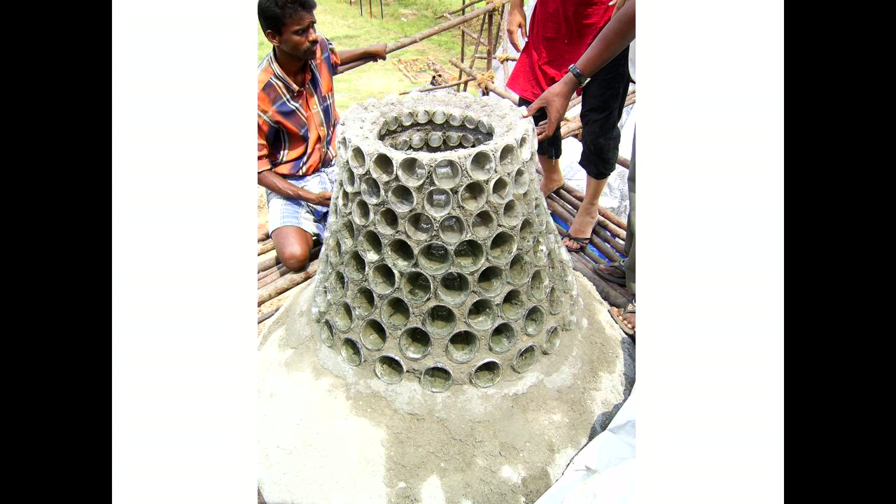So we finished the remaining part of the project also, with broken glasses, and we used a lot of urban waste to finish the house, but also to waterproof these areas with broken tiles.

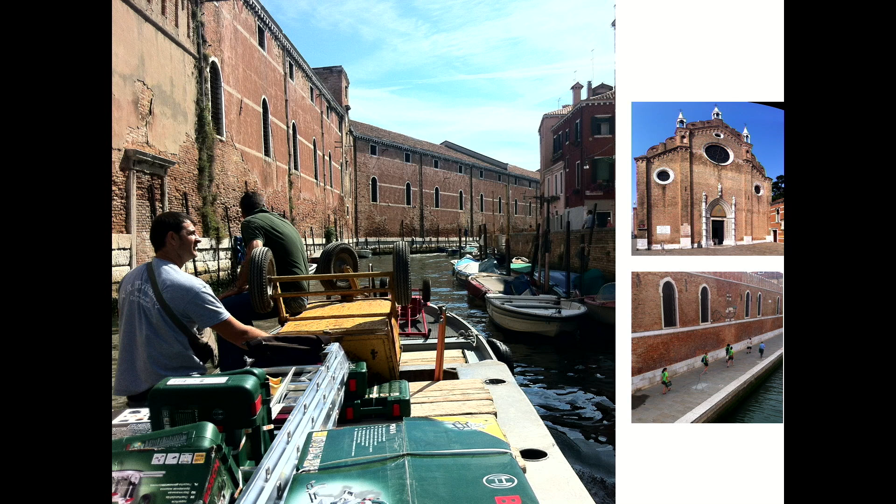And that's what it is now. I'll just show you a few images without explaining much, since we're talking about brick — and earlier we talked about Venice. When I was called to Venice, the first time I participated in Chipperfield's Biennale, I want to end with a few images from there. I saw exactly this kind of patchwork city. For me, Venice is a brick city, and everywhere you see that when the plaster has peeled off, you see the different layers of history, where brick architecture was always made economically, as a patchwork.

It was called Common Ground, so I thought it best to go inside that Arsenale space where you could see the brickwork only because the plaster was down, so you could see the construction.

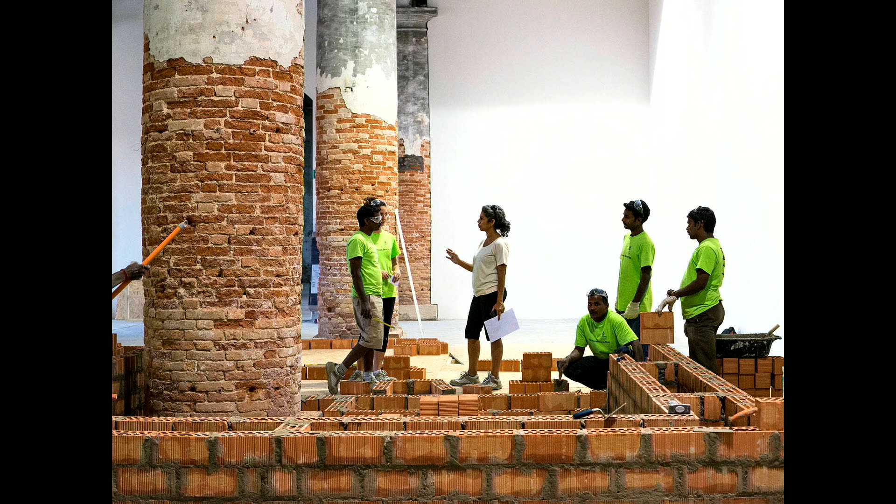So I got the idea — above here is a Mangalore tile, like the terracotta tiles too. I thought it would be quite nice to install this to show that the common ground is actually gravity and the natural laws. It's the same whether you're in Italy or in India — if a vault stands here, it will stand there. And the humans are also the same; we didn't change biologically so much.

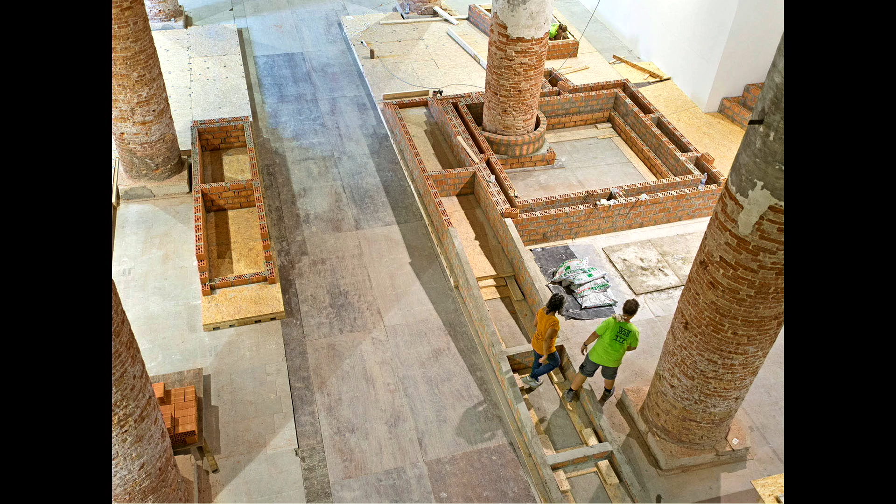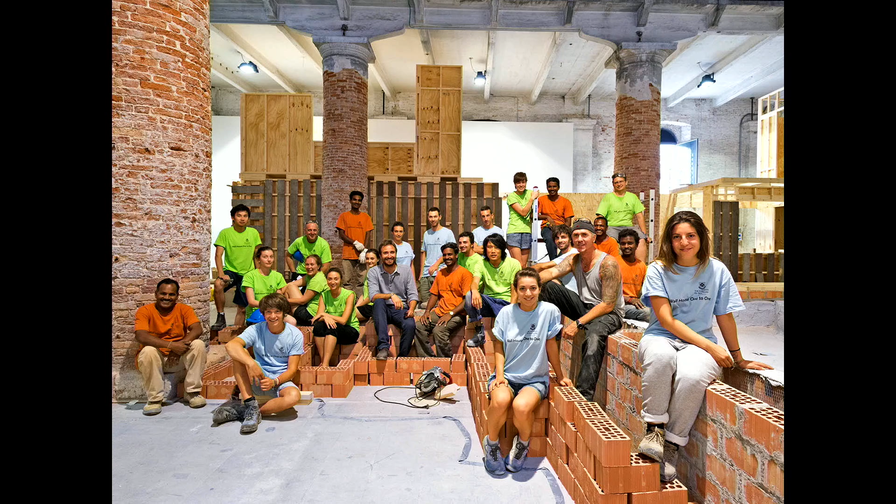So here I had the occasion to make the foundation with contemporary bricks because we are on Venice ground, and the Venetians cannot use those bricks anymore, but my bricks look more like Venetian bricks when I brought them. These were all to show the common ground, and we produced all of this in full scale — a whole house in 6 weeks with our students, including the roof — but I also did some new touches there.

I wanted to test with glass bottles. With Venice, we got our wine bottles — we didn't drink all of that. But anyway, this is the final house, Common Ground.

You see the roof above, the wall and the pillar next to it — the same language. One is from rural Tamil Nadu, which would look unsuitable in Italy. But, you know, it's just juxtaposing those two things.

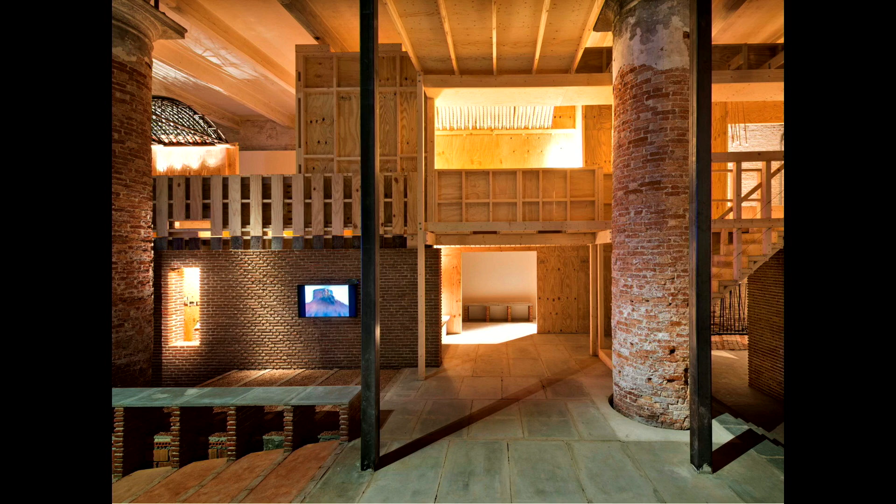And three more images from my recent exhibition in Louisiana called Taking Time.

The intention was not to delay and take time in that meaning, but the idea is to think about architecture not only from the space point of view, but also from the time point of view, in terms of which time we are building in, and to not see things in isolation, but to zoom out and see the big picture.

Taking the time means not to dismiss something today because we say time is money, time is money. Time is all we have. Time is our life, and if we take it, we will be more fulfilled.

Taking time means to just take things in our own hands. And taking time mostly means to take the time to think. Thank you.

Good evening. Oh, good evening.